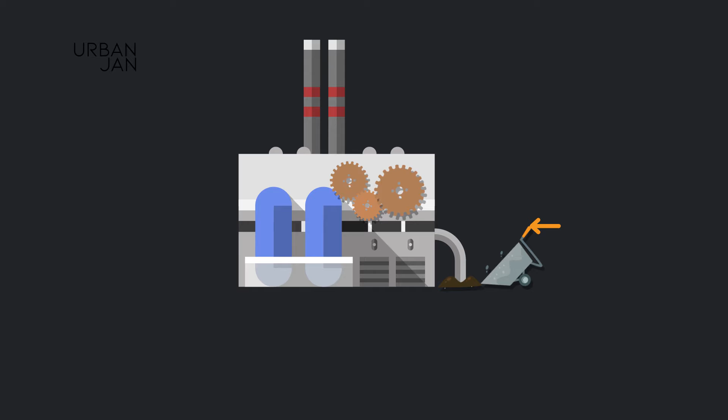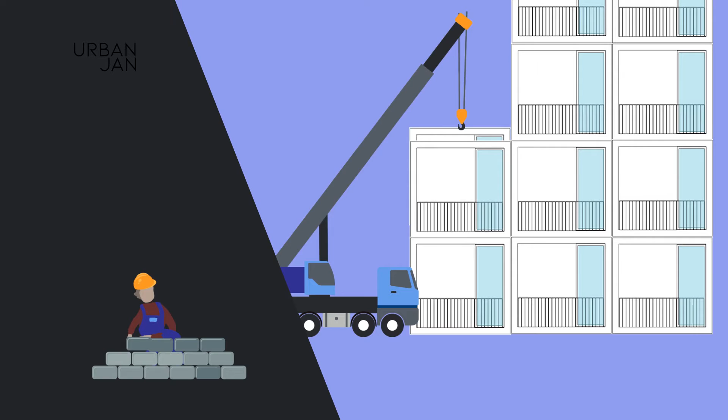The advantages of industrialization are the manufacturing speed, the cost optimization, the technical accuracy and control, and the speed of on-site construction. However, very often the use of industrialization results in a monotonous and repetitive final product, which makes it difficult for residents to engage with their new built environment.

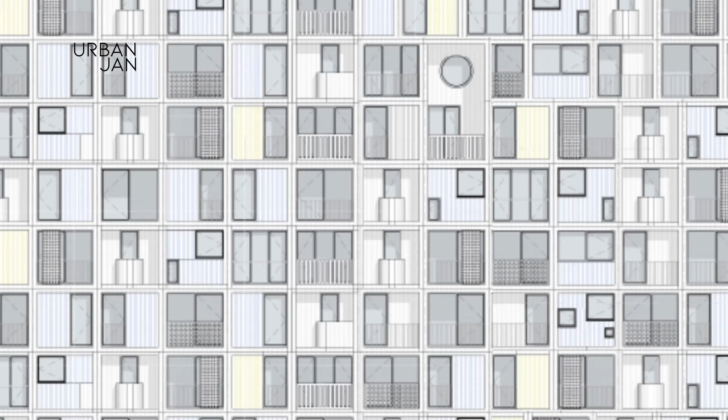Losing this attachment often leads to the quick degeneration of residential areas, as was the result in post-war developments where communities completely lost their sense of belonging. With our proposal, we combine these two aspects of mass housing, the advantages of industrialization and providing personalized solutions that create a sense of identity.

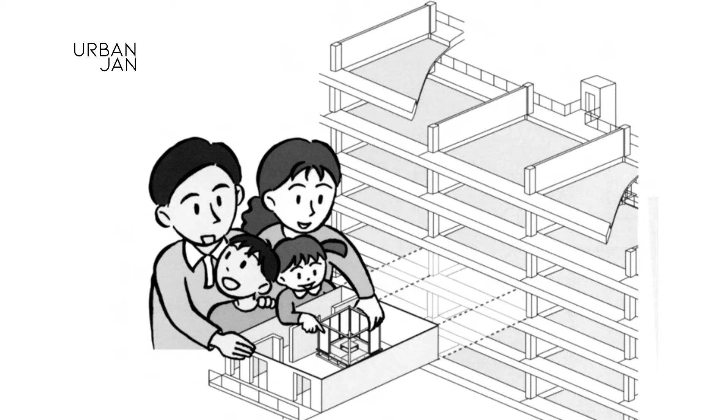These questions are not new, but have been the center of the discussion on housing during the 20th century. The importance of the final user engagement was largely studied by John Habraken in the 60s. The Dutch architect published his book Supports, an Alternative to Mass Housing, as a reaction to the homogeneous and repetitive post-war housing developments.

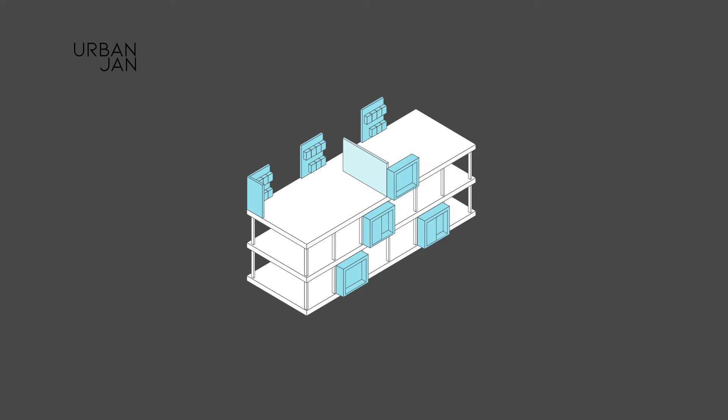The main points in Habraken's theory were the separation of an everlasting infrastructural system, support, from that which can be transformable, the infill components, introducing the user as participant in the design process. During the second half of the last century, these ideas have been tested, but only in isolated housing experiments.

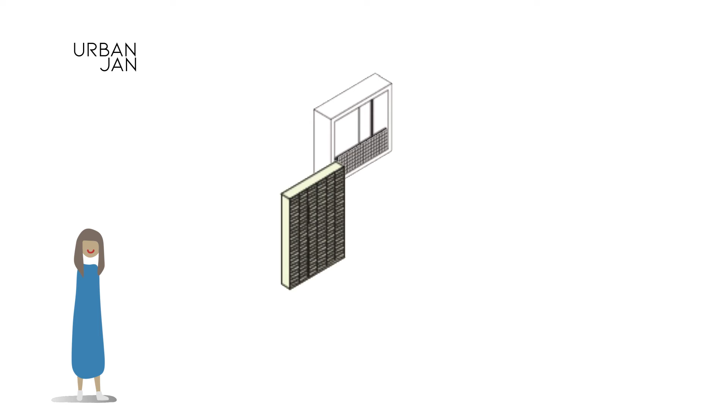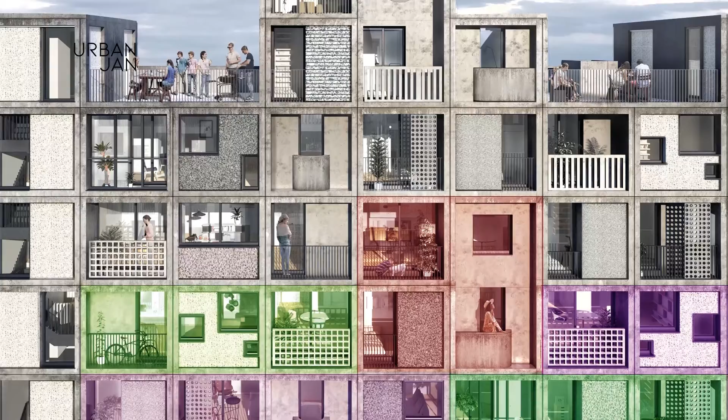Based on this theoretical background, our proposal offers an industrialized system at a large scale which addresses social issues by involving the end user in the design process. The future resident is given the possibility of choice based on a catalog of facade and servicing components. The future appearance of entire neighborhoods will be defined by the residents' choices, empowering the sense of identity and belonging.

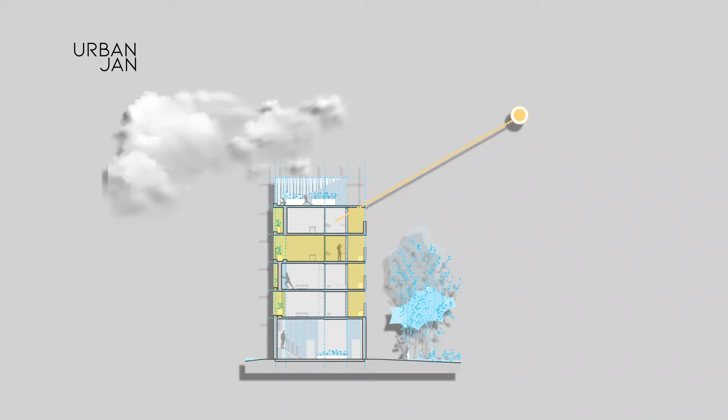This catalog of components also takes into consideration the following: environmental conditions like orientation or climatology of the site, the internal functional requirements, user preferences, and budget.

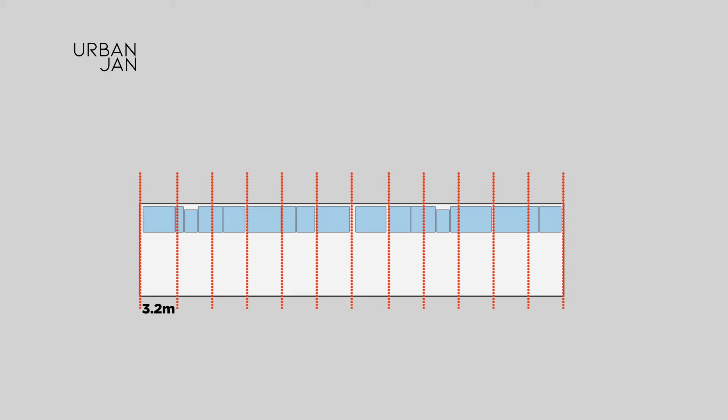The buildings are organized using a 3.2 grid which forms the support structure, and within it standardized plug-in pods, which are the bathrooms and kitchens, are simply slid at the rear of the frame, and the facade components are hung at the front from the slab edge. These are made of precast concrete, an integral solution including insulation and external cladding.

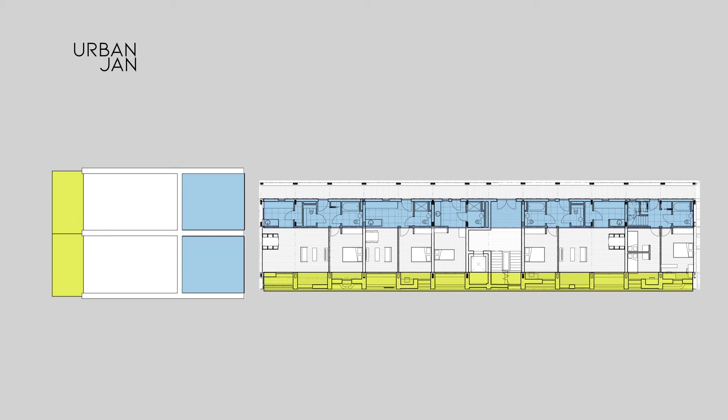This creates an arrangement based on functional bands, the service zone, the living area, and the active facade, which allows the optimization of the dwellings and a good use of the space. The gallery building is composed of a vertical communication core in the center and an access deck. The flats are added next to and on top of each other, with the larger units arranged in two levels, enjoying dual aspect and cross ventilation.

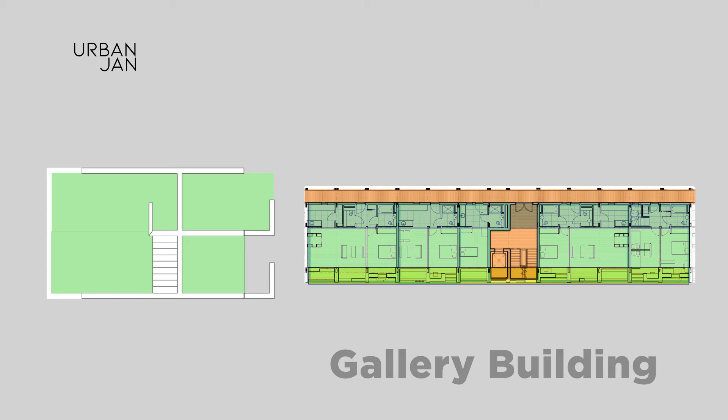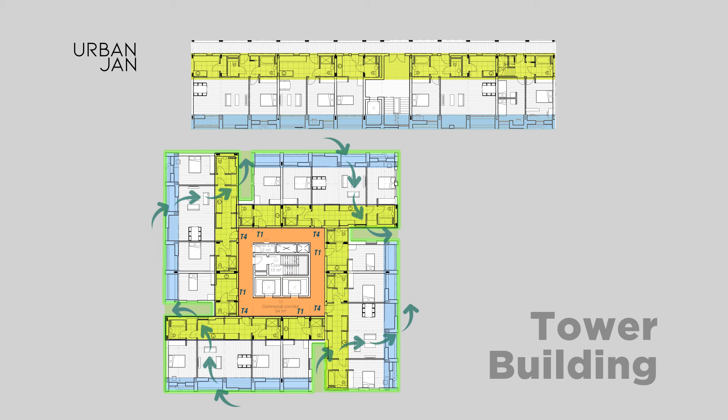The tower is put together using a 4-module cluster placed around a vertical core, which allows for the inclusion of all apartment sizes. The cluster arrangement maximizes the efficiency by reducing the circulation and giving most units a corner condition. The slab block is arranged by mirroring the layouts across the communal corridor. In this case, the larger units are located on both ends of the corridor to provide them with dual aspect and cross ventilation.

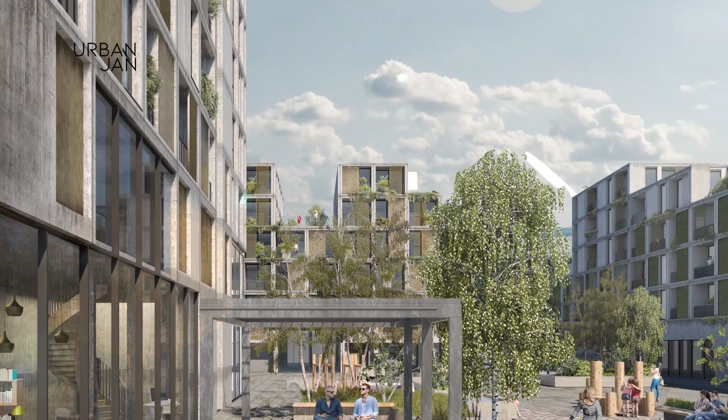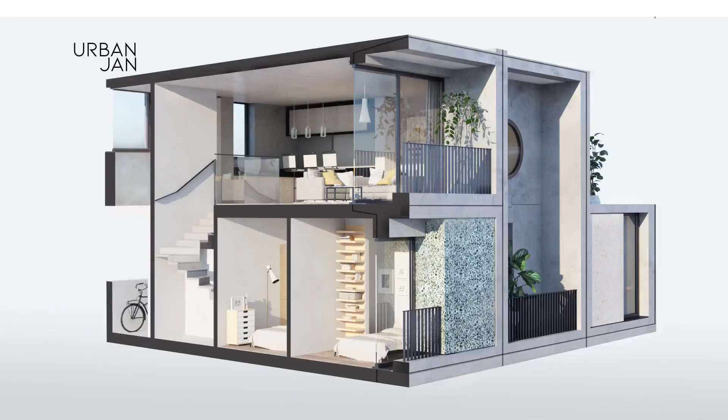Overall, the proposal aims to offer high-quality apartments conceived from a simple and flexible design system. The space planning solutions adopted make it possible to achieve efficient layouts suitable for different households and users. The technical devices proposed give the scheme a great capacity of adaptation and customization, optimize energy resources, and favor the economic viability of the development.